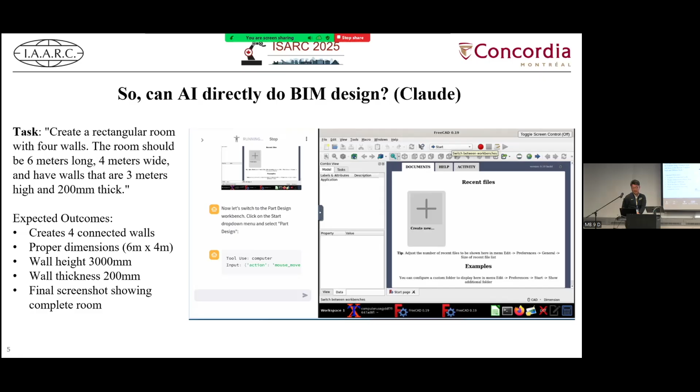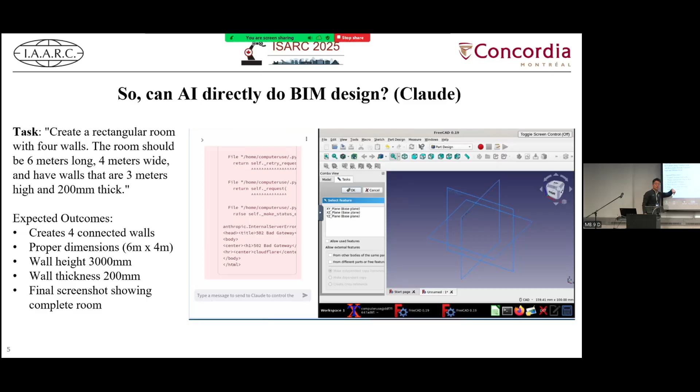The computer rebooted the program, FreeCAD, tried to open a new project, set the default planes, and ended up with errors. The main issue we encountered was a lack of tokens—tokens that the large language model needs to process the command. So we tried multiple times with slightly different settings and fine-tuning.

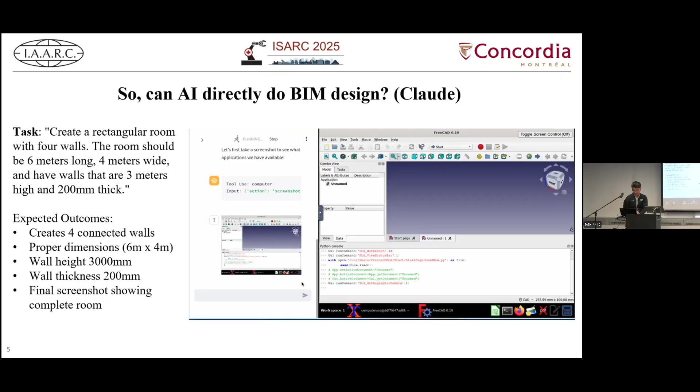It worked eventually—again, we didn't do anything ourselves, just used the Claude AI and changed different settings, and this time it worked. So this time we tried something a little different: we created one wall as a reference and asked the computer to generate the other walls at the same size as I described in the previous slide.

But this time it got messed up. It worked, in that it didn't crash the software, but the components got messed up—the walls should be connected edge to edge, but apparently they weren't.

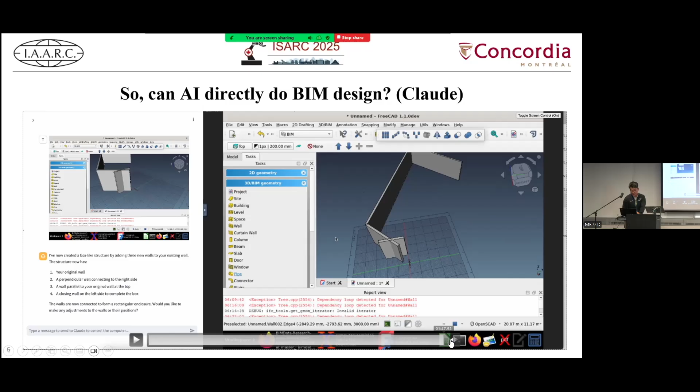All right, so this is the end of the process. With the command that I asked, it's exactly the same thing: create a 6 meter and 4 meter wide rectangular wall with certain thicknesses.

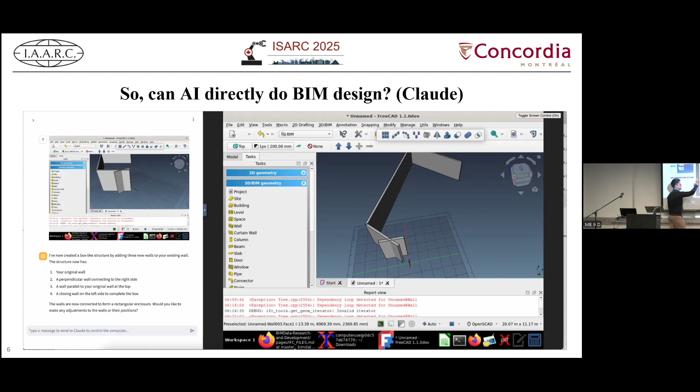So this is the starting point that we did. We did this research, and as I explained, the platform that we tested is FreeCAD in the Linux space. We looked at the BIM domain knowledge and also the FreeCAD integration layers, converting that knowledge and layering the UI/UX systems into the code to integrate with Claude AI workflows.

Did we actually write that code one by one? No, we asked AI to generate it. We didn't do much, but we double-checked if it was correct or not. So we asked AI to create this code to use the BIM domain knowledge.

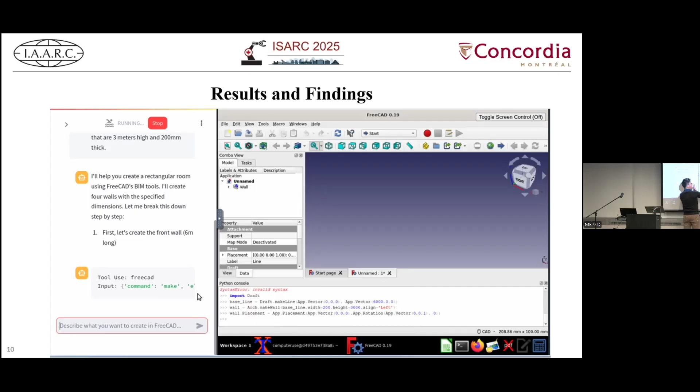But this time, the Python console shows the domains—which part of BIM knowledge this software uses—and also the integration layers as well.

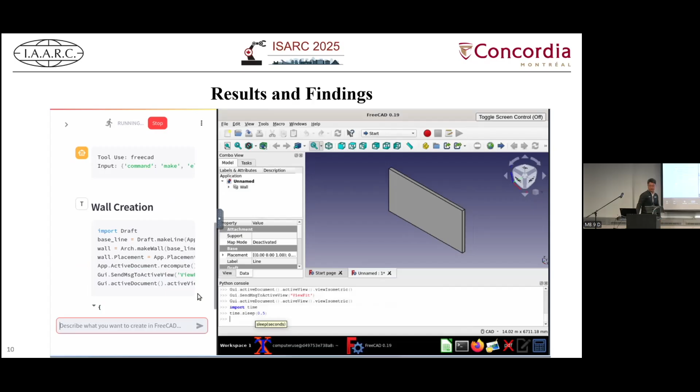In the chat box, we asked it to create the 4 rectangular walls first. Moving forward, it shows step-by-step the thicknesses and sizes of the walls created in FreeCAD. It looks disconnected, but actually it's connected as an element.

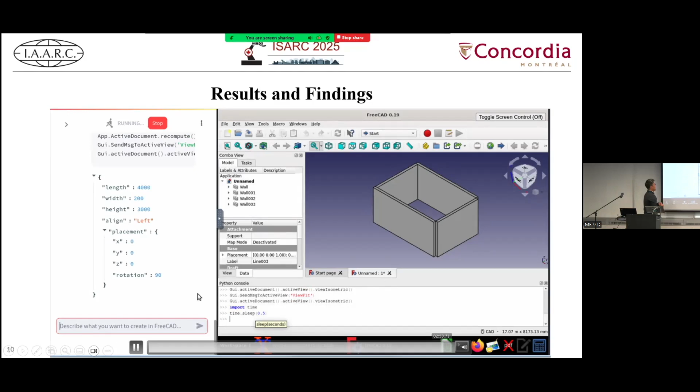It completed the task with 4 completed walls attached to each other. So yeah, it's very simple, not rocket science, but at least the computer can understand the task and work from scratch to the end. The users were also able to see what was happening in the software once the initial command was provided—elements selected, elements moved, coordinates provided, and so on.

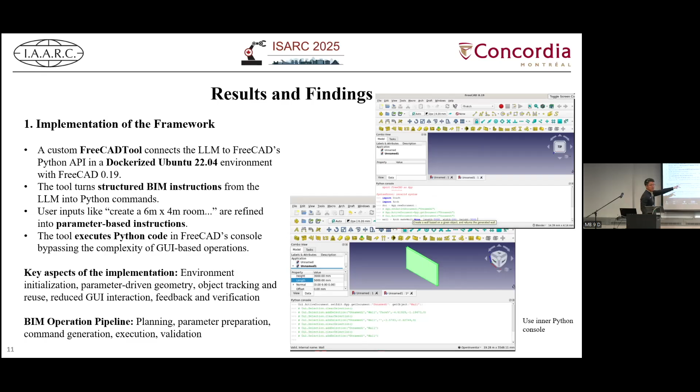We compared the original framework—no manipulations, just cloud AI—with the enhanced framework. A significant finding was the token usage during this simple task. The original framework used more than 130,000 tokens, and that got reduced by about 40 to 45%. So the summary is: 40% reduction in token usage, along with improvement in required time and results.

But the limitations are this: we tested this system and framework with a very simple task, just creating 4 walls together. If we use that framework for more complicated systems, like creating a window on existing walls on different sides, that might be really challenging.

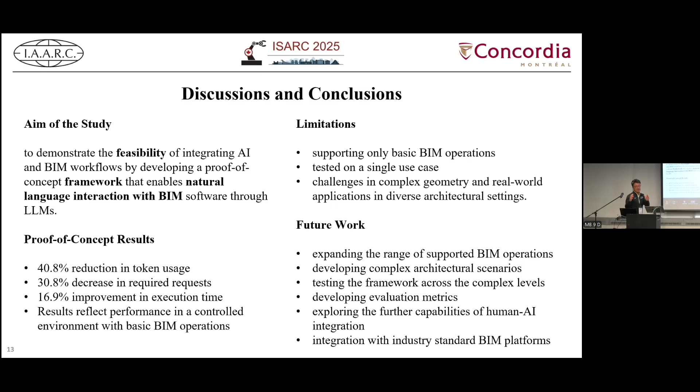So future work is related to these limitations. We want to continue this path to see how AI can help make automated BIM workflows. All right, that's all I have.